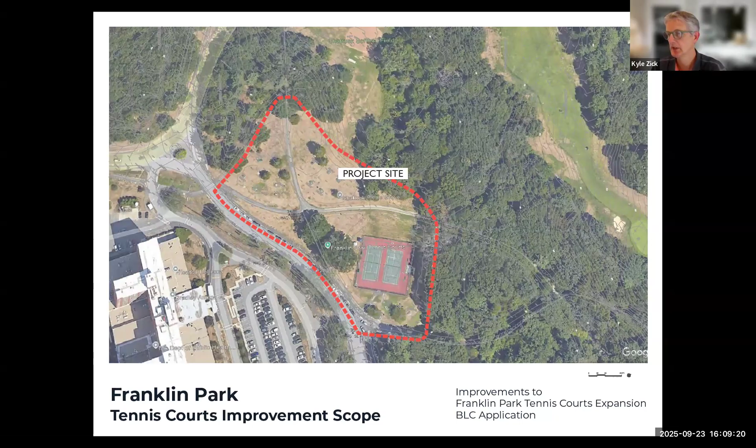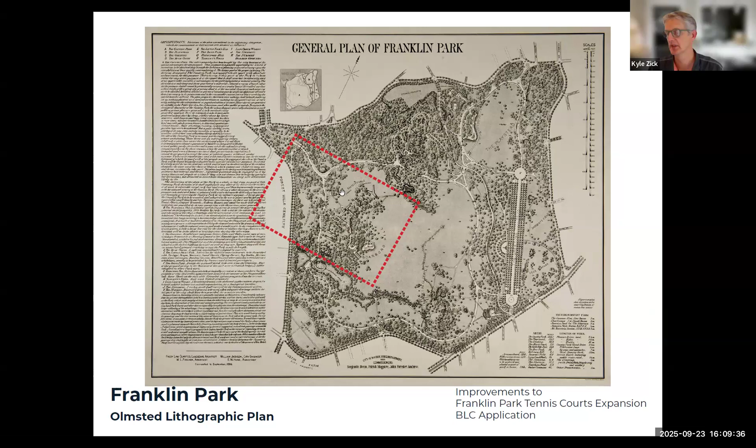Of course, the entire park was designed by Frederick Olmsted in the late 1800s. This lithograph represents the original design intent. I'll zoom into the area in this red dashed line. Generally, it's in this area of Ellicottdale. So Ellicottdale has had tennis grounds proposed from day one. It was lawn tennis, but there were dozens of tennis courts in this area. Our project site is right here, and this is the Shattuck Hospital.

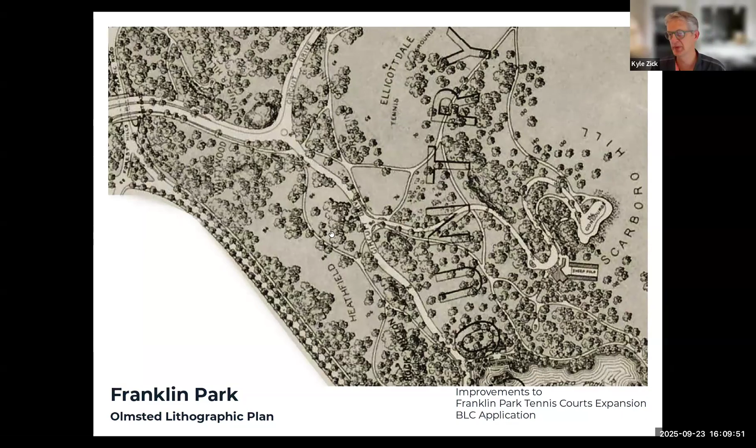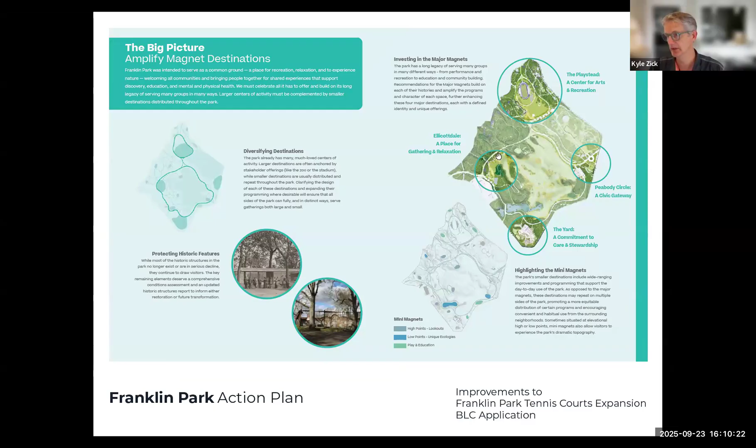As Lauren mentioned, this project was envisioned as part of the large amplification of magnet locations in the park, Ellicottdale being one of them. The tennis expansion was part of that idea that came out of the public involvement process.

They were showing 4 tennis courts. The reason we're doing 5 is because it allows Boston Public Schools to hold matches here, and there's a loss of tennis courts as part of the White Stadium project.

But the action plan recommended retaining the upper lawn and then having a lower lawn, which is outside of our project area - that's where the softball field is - and expanding the tennis courts. And number 4, adding a pavilion or shade structure to mitigate heat.

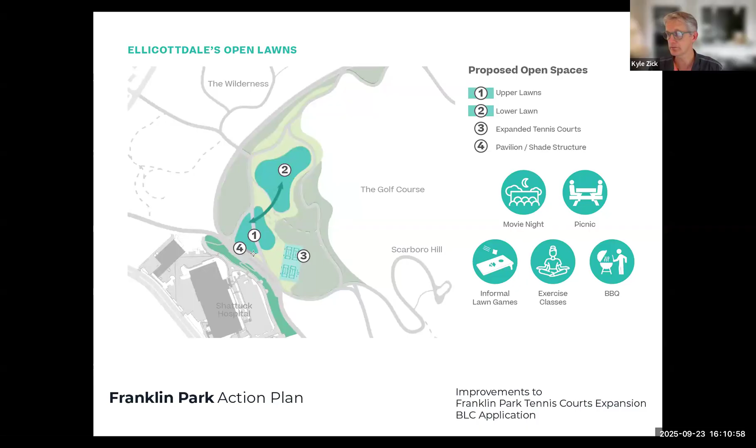Pathways would generally remain the same, although there were some alternative paths that are beyond our project scope. Within our project area, we're retaining or repaving as they are.

What exists today are a number of picnic tables, hot coal bins for people to dispose of their charcoal, trash receptacles, 2 paved tennis courts, and then trees and lawn.

Along the parking area, there's a running granite block wall that keeps cars from driving into the park.

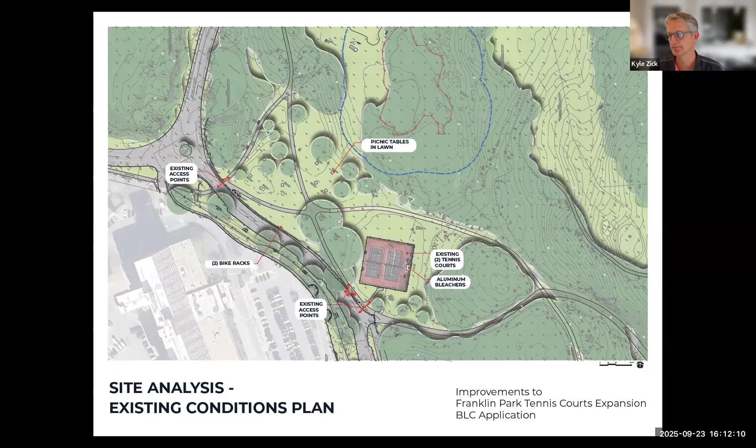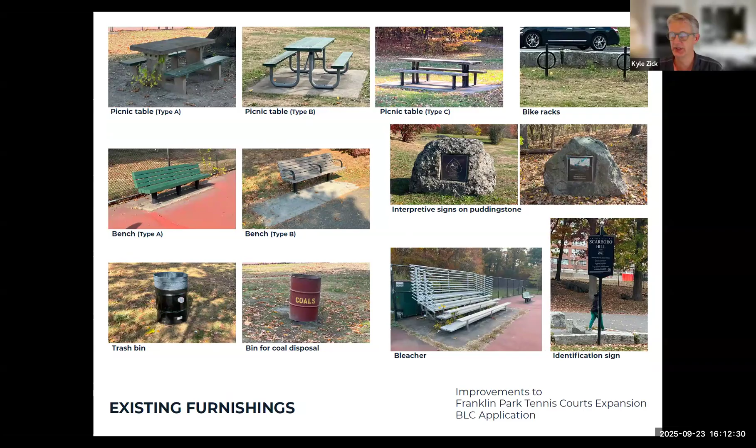The furniture that's out there now is tired - it's been out there more than a generation. You see concrete bases with wood that's worn, some metal and wood, some signage from the 1980s, the hot coal bins, bleachers, and signage that's representative of the Emerald Necklace.

The tennis court itself, I think, was from the 1960s, late 60s - asphalt tennis court with a red on green color scheme, chain link fence around it, plain aluminum bleachers, storage area.

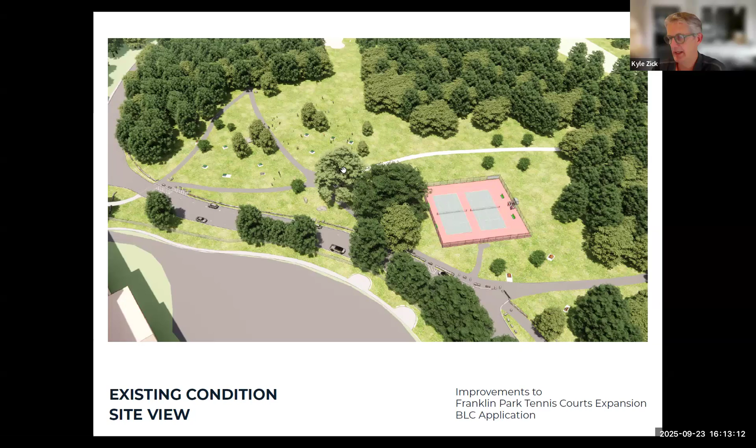We're adding a path parallel to the parking so that people can get out of their car, go through an entrance, and then traverse along parallel to the parking. It's also a desire line for people coming this direction to go towards Scarboro Pond and not be in the road. The 2 existing tennis courts are here.

So we have 2 courts to replace them, shifted a little south, and then 3 additional courts here in the same roughly north-south configuration, because that's ideal for tennis play.

And then the picnic area will be replacing the picnic tables almost in kind in terms of location, but we do shift them. We're also making them accessible and adding shade to 2 different picnic areas. And then we have shaded seating for spectators or for park use on 2 sides of the tennis area.

And then there's a little bit more substance in terms of the entrance to the tennis court, because it is such a social place. So we have some picnic tables there, a bulletin board for information. We have a blue bike dock, and we have a screen for temporary restrooms.

And Kyle, really—yep, quickly, sorry to jump in.

If we could jump back to that last page, I just want to clarify that when we talk about having 2 shaded picnic tables and 2 shaded seating areas at the tennis courts, that's 1 of each - 1 shaded seating at the tennis and 1 shaded picnic table - will be in the base bid for the project. Depending on the money, we will have as ad alternates the ability to have a second shaded picnic table and a second shaded seating at the tennis. I just wanted to clarify that.

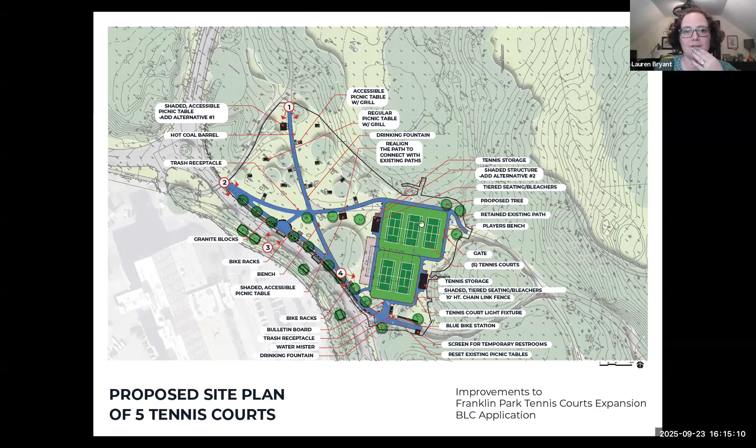And we'd be able to report on those findings before we do any construction. But because there is such interest in the tennis particularly, we would phase the construction of the tennis first and have the archaeologists do the excavation in the tennis area first, to keep our timeline moving.

Kyle, can I also just say that in addition to the Ellicott House site that is of interest, also where the tennis courts are, because of the stream downhill from the tennis courts, there's also interest in the tennis area for native archaeological finds.

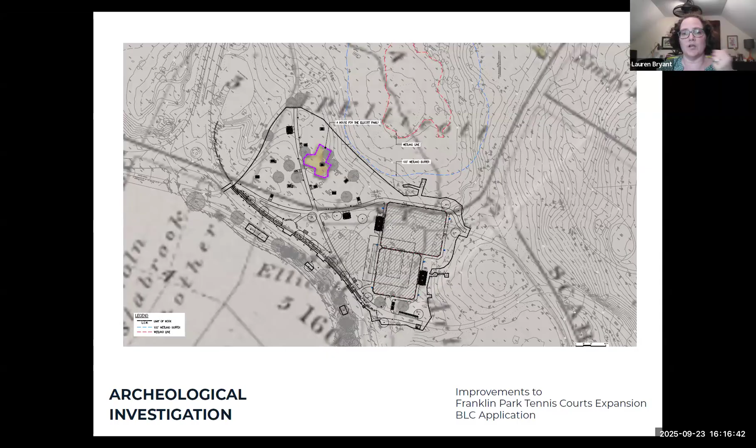And these are lighted tennis courts. That is because we get so much more use throughout the year by having light here, and there are no neighbors that the light would really impact. Plus, modern tennis lighting, you can really control light pollution very well.

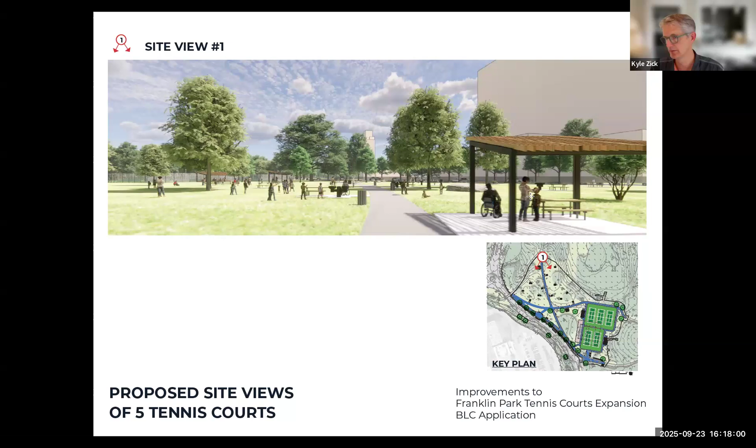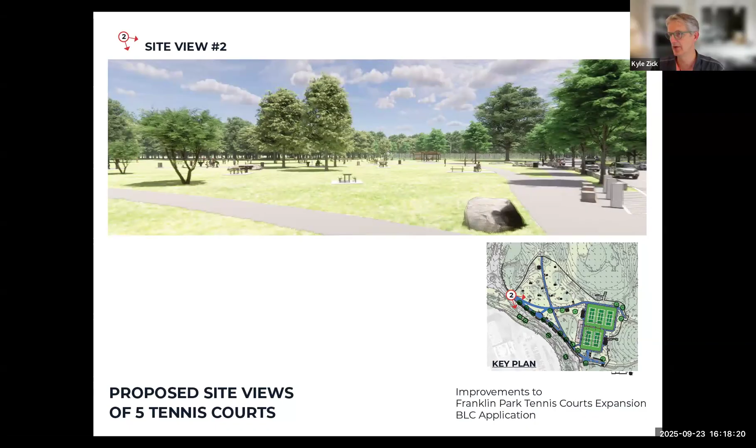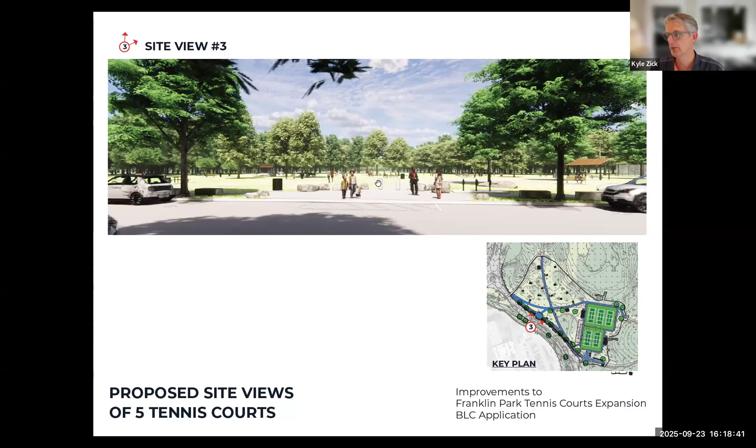This is a new entrance off of the parking and driveway to allow people to spill from the roadway into the park and along that new pathway. There is a ledge outcropping of Roxbury puddingstone here already, so we're kind of following that with this semicircular form, but then have some granite bollards to restrict access.

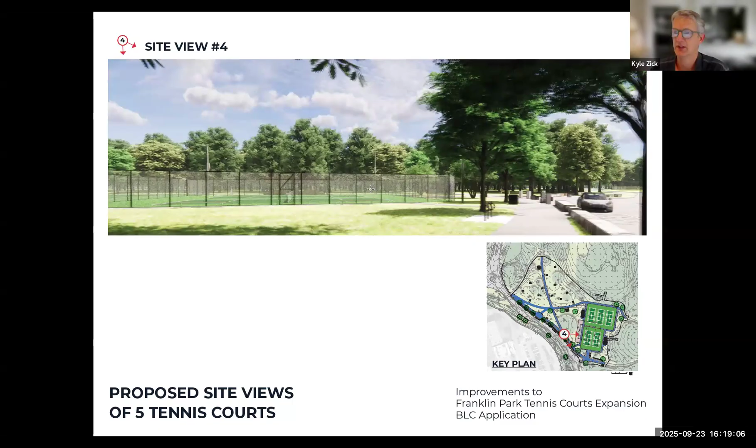And then as you get closer to this tennis court, it is a 10-foot high chain link fence, and that's something we coordinated with the Franklin Park Tennis Association, because they have a lot of beginners here and a strong teaching program. They felt that the tall fence around the perimeter was very important, because with beginners, balls tend to go in all directions, not always purposefully.

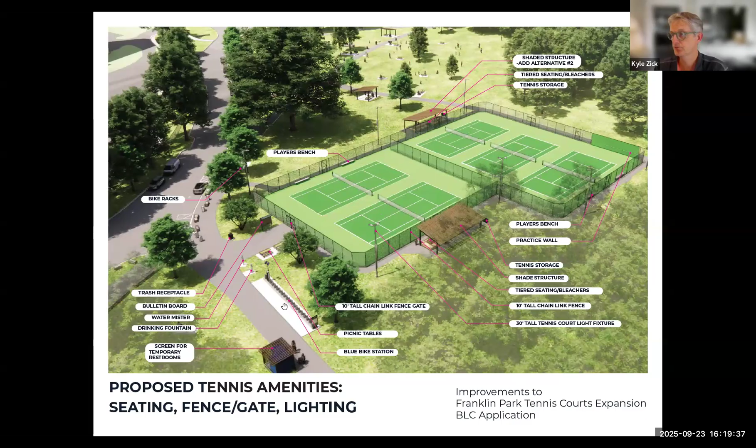The furnishings are similar in family to what exists, but all a little more consistent and all new. Picnic tables have a black steel base and a wooden top. The benches have similar materials, and we have accessible versions and companion spaces. The base bid for spectator seating is a powder-coated black bleacher. We also have drinking fountains, grills, bike racks, and the blue bike dock, plus trash receptacles and disposal for hot coals.

And I mentioned the tennis court light fixtures. Here's an example of those.

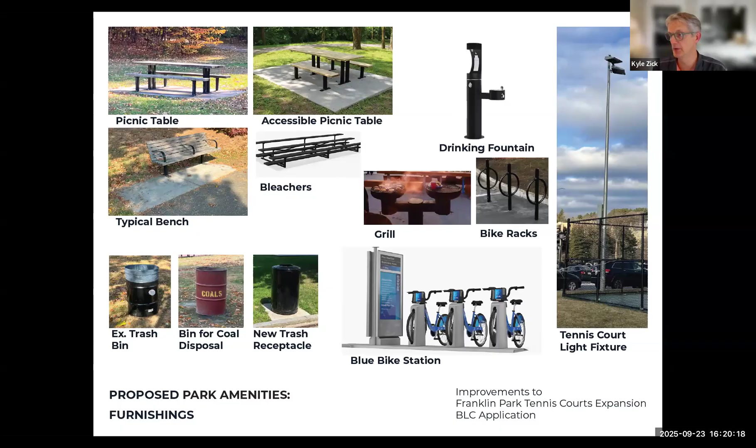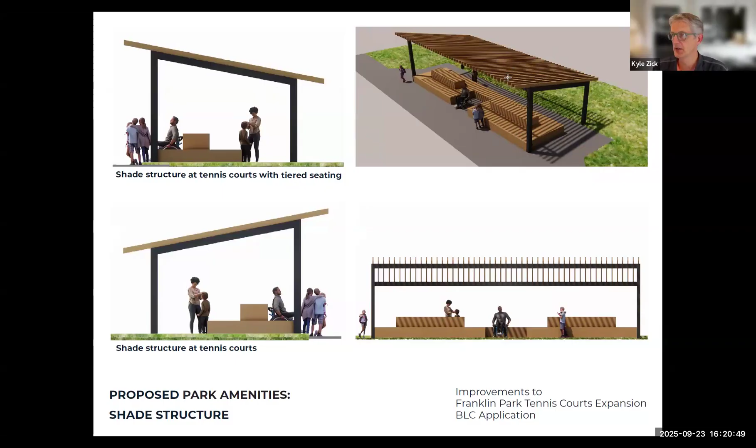I wanted to show a few views, particularly focused on the shade structures. This is one of the larger ones adjacent to the tennis area. There's two—one would be base bid, one is an add alternate—and we have tiered seating underneath. The base bid would be that black powder coated aluminum bleacher, but it has an angled top. We're trying to maximize the amount of shade we get on the seats themselves. This would be a black metal frame with a contrasting color purlin on top.

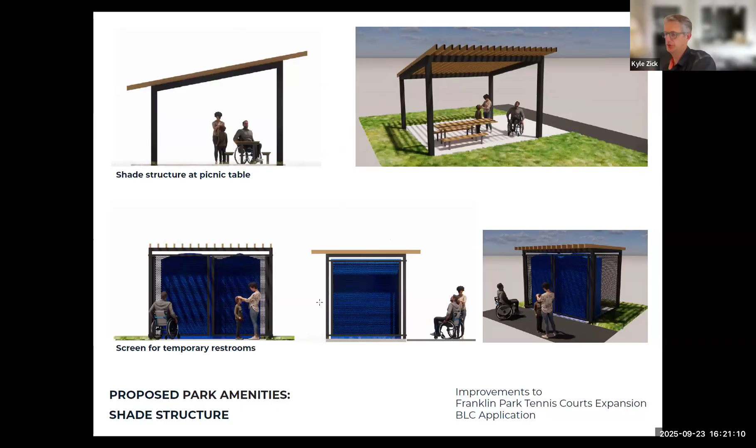The picnic shade structures are similar in design, same kind of framework, same slope, just smaller in scale. Similarly, the screen for the temporary restroom has the same structure, but we do have a perforated metal panel to help minimize the view of the restrooms. And then I'll wrap up going back to the view of the proposed project so we can talk about your comments or questions.

Okay, thank you. I just have a quick question, you might have already mentioned it, but I didn't catch it. The surface of the tennis courts—is that going to be a granule or a rubberized surface, or is it asphalt again?

No, it's paved, but it's post-tension concrete, and it will have this green-on-green color surface. The reason we're doing post-tension concrete is it lasts much longer than asphalt. With asphalt, you'd expect to see cracking within 5 to 10 years, but with post-tension concrete, it's a 50-year court. You just have to redo the top surface on a regular basis.

I don't have any more questions about it. I think it looks fine the way it's been presented. So do the other commissioners—Walker, Orlando, or Haney—have any comments? Thanks, David, I'll jump in.

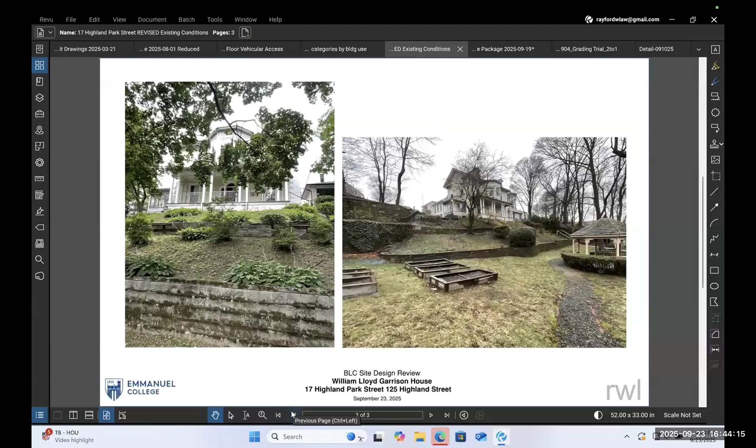Okay, great, thank you for coming back, and thank you for coming back so quickly. Well, motivation, I think, would be the operative term there. So let's pull up... oh, like leave the meeting? Let me use the back. You want to leave? Okay, we have audio and video for everyone?

Yeah, we do. Great. Just briefly, this is a continuance from our last meeting, and we heard your remarks very clearly, and wanted to get back as soon as possible to respond, because the construction, as you see from some of the photographs, is underway, and we'd love to at least start the process for the site work in conjunction with the wrapping up of the construction in a few months.

I think just to briefly review the existing conditions that we're primarily responding to before we met with you: the grade that we see in the photographs from the 19th century has definitely dropped off, so that we see almost a 4-foot delta between the porch floor and the surrounding grade. After 170 years or so of erosion and wear, we would like to actually restore that. You can see it quite dramatically here in the picture of the front porch, and then looking up as well.

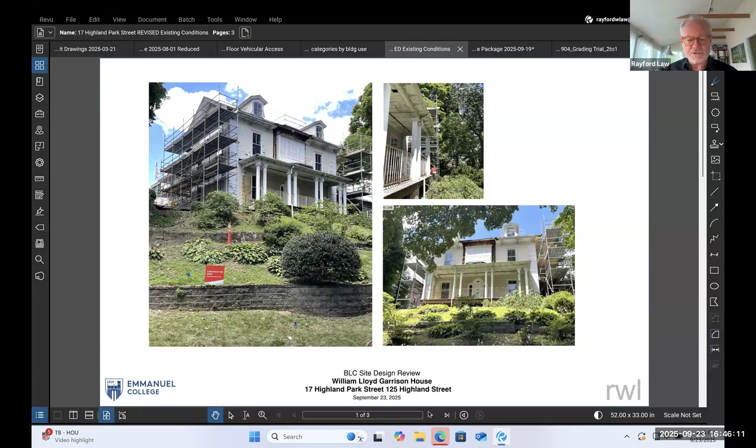Also to note that there have been retaining walls in place. We're not quite sure when they occurred, but we don't consider them to be historical, and in the interim case here in the middle of the site, they're certainly not functional. This stone wall is falling apart, it's visible right now. The timber, wood, the railroad ties that are here are actually rotting and do not do any work. The wall at the bottom, which is a cast product, not natural stone, is doing the work, and we anticipate, in response to your remarks, that we would maintain a wall at this base.

Then a general sense of the landscape as it exists today.

We do want to note, in the context of previous discussions, that with the photographs we have at hand, the porch floor really was never visible from the sidewalk. We say that because we can look at the 1891 photo here. You see the street lamp, which means we're clearly across the street and elevated probably 10 to 15 feet in the air. Similarly, in the high resolution photograph we've relied on for the historical detail of the exterior restoration, we can barely make out the porch, but that light fixture is in the lower right-hand corner of the image.

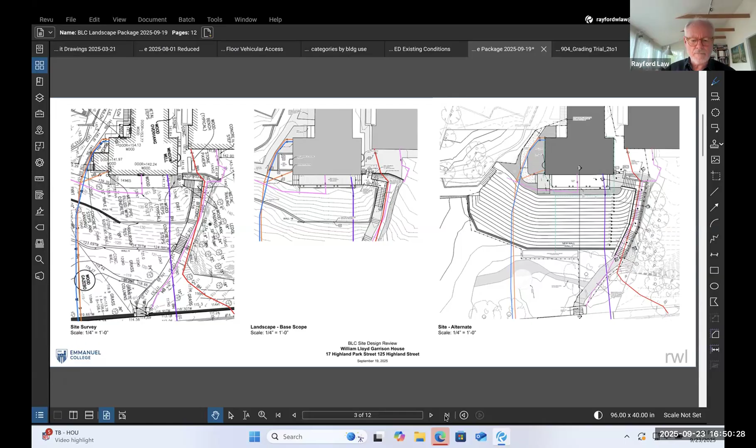I'll show you the detail of that. A little more detail, just to show the 2-to-1 slope we have here, 2 horizontal, 1 vertical. There will be an upgrade to the utilities. We have this unfortunate marriage of water and sewer that has been inherited, which we will separate somewhat on the hillside here; we will leave it as is once it goes out to the street. The gas, we can't speak for the gas company, they tend to operate on their own terms, but you can see the stormwater coming down from the house above. Fiber optic and electric will be running down underneath the stairs. The existing stairs are here, so there's really minimal impact, and we're balancing the cut and fill so there's very little additional site work to do on that part of the site.

Showing you the site section, the clear, simple landform that Kyle has helped us with, showing that 2-to-1 slope, the 3 to 4 feet from the edge of the porch to the break in the grade, and then about a 4.5 to 5 foot wall at the base. You see the stormwater basin here. And then, just for reference, we were showing the views from a pedestrian on the sidewalk, how close we get to seeing the porch, and then what we presume to be the camera viewpoint from 1891, 1892, or in that case, 1876.

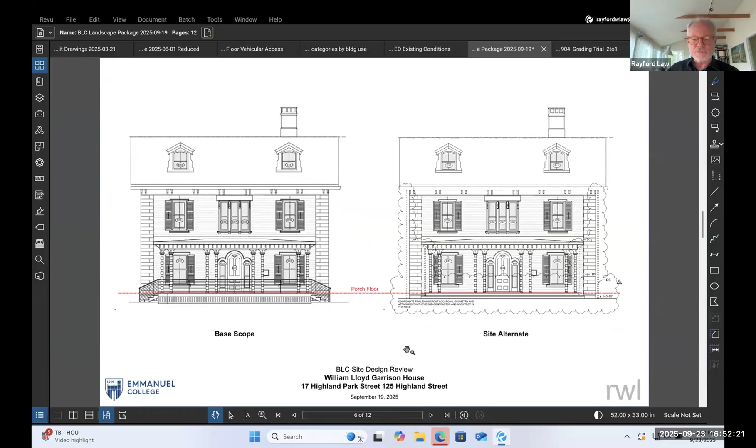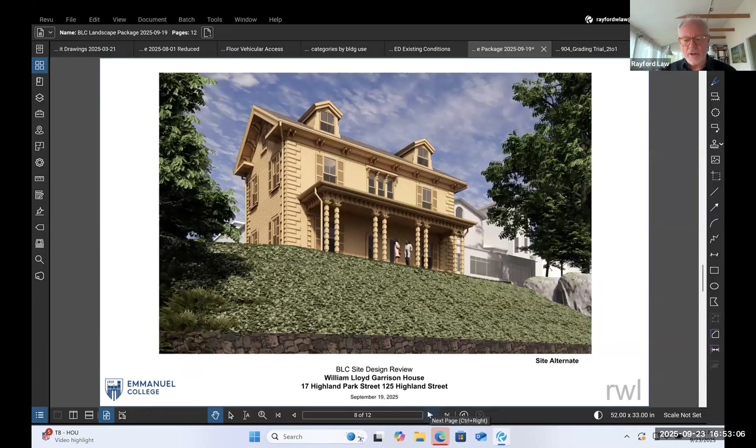Kyle has proposed a couple of different varieties of ground cover. Here we're just showing the English ivy. We think that's the simplest and the richest and hardiest that we can use here, and to keep all of the planting quite simple and keep the landform simple as well.

Just to confirm the views, the historic views from the sidewalk, we set up this that shows the wall in the foreground that's being rebuilt, the stair wall that's a function of rebuilding the stairs. Because with the increased height of the grade, we re-parsed out the runs of the treads to evenly head up the hill.

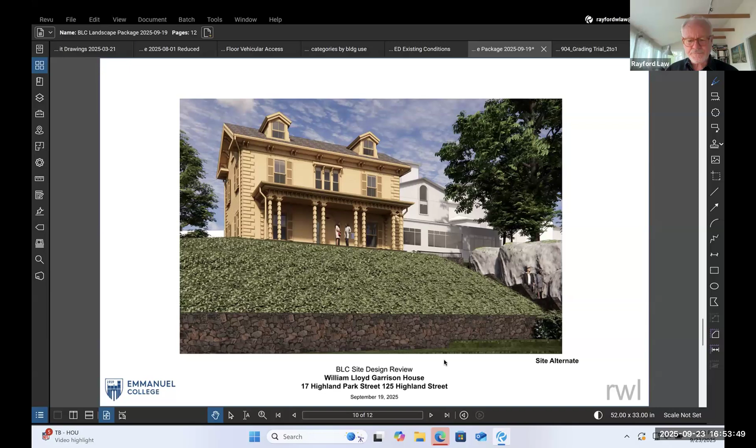The model that we were using to make sure that the geometry for both the landform and the stair is working out, as well as the detail for how the stormwater chamber and the excavation for that would be tied into the construction of the one retaining wall at the base of the hill.

We're looking for locally sourced, we're going to say granite, whether it comes from Vermont, New Hampshire, or Massachusetts. At the moment, the available one seems to be the Ticonderoga. Puddingstone is not available. We need probably 20 cubic yards of stone, and unless someone is offering their foundation wall, their house, we just don't see that being commercially available. So we were looking for a random ashlar that will have a dark mortar that would blend in. The intent would be to have the wall tend to disappear into the landscape.

And that, I think, would summarize the intent with our coming back to you. Kyle, do you want to add anything? No, I think you covered it. Thank you. Thanks, Rayford. Thank you.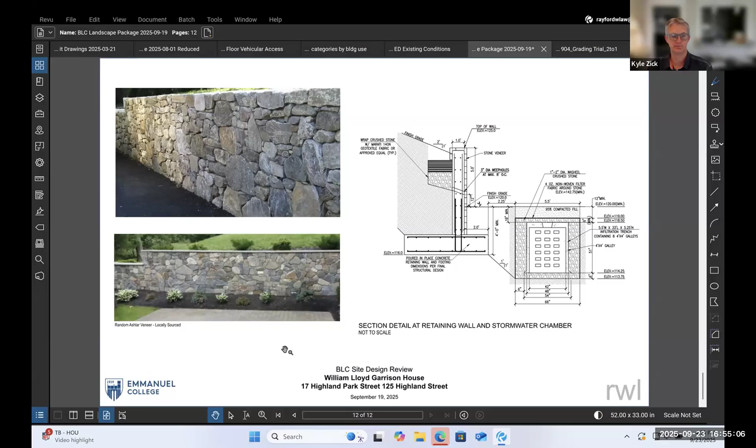So with the 2-to-1 slope, you don't need to do any subsurface reinforcement at all to the soil? No, 2-to-1 is very reliable in terms of being able to, with an aggressive ground cover like we're proposing, we can maintain that very easily.

Well, I think it's a huge improvement. This looks terrific, I think, eliminating those walls. But I thought you said the wall at the very base, I thought you said that was an existing segmental retaining wall that's there. There is. It is an existing one there, but because of how we're regrading, we feel the need to rebuild it.

Just the accumulation of the forces, and also it's not a wall that we would say we're fond of, and it is doing the work, and we have to do the excavation anyway for the stormwater. It just seemed to make a lot of sense for the benefit of the durability of the project over time to rebuild that wall in the same manner that we will be building the stairs.

Right. I'm glad to see the segmental retaining wall gone, and then this will be a stone veneer on it, I'm assuming from the detail I think I saw. So it'll be much nicer looking.

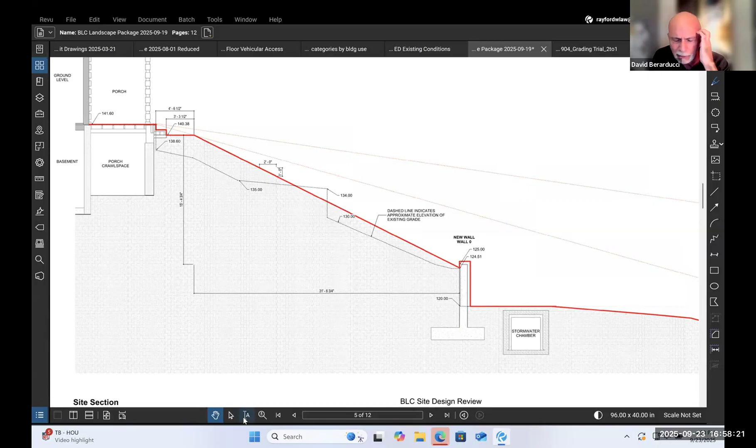Okay, it looks great. And did I see, I thought I saw somewhere when I was scanning the presentation, are you planning to put some 3 trees in the front?

Well, I appreciate the question, Dave. When we look at the historic photos, we did notice the pause in the landscape. And Kyle will attest because he's been quite good as a vigilant caretaker of the landform, that we just want to keep it simple. As much as there is, I'll just say, a scale device that was, I'll assume, deliberately employed, it just gets really tricky in terms of how one might introduce the planting for that type of feature. And at the end of the day, in a non-residential, institutional use that we feel will have, I'll just say, less attention paid to the maintenance of the landscape than a resident might, we felt like just to keep it simple and keep the ground cover going and continuous.

But we looked at that and we tried, and that's in fact what was submitted and what you were looking at. But I think Kyle quite correctly said, you know, it's going to be a tough one, picking the right things, because you can see there's a casualness here that we couldn't actually entertain with the formality of that landform. Yeah, and no, I mean, I think it's going to be better without it.

And it would be tough to create a little bit of a shelf for the water to settle on the tree roots rather than just wash off. So I think it's going to, and then it won't block the house at all, I think, as the trees got larger. So I think it's nice to keep it clean and open.

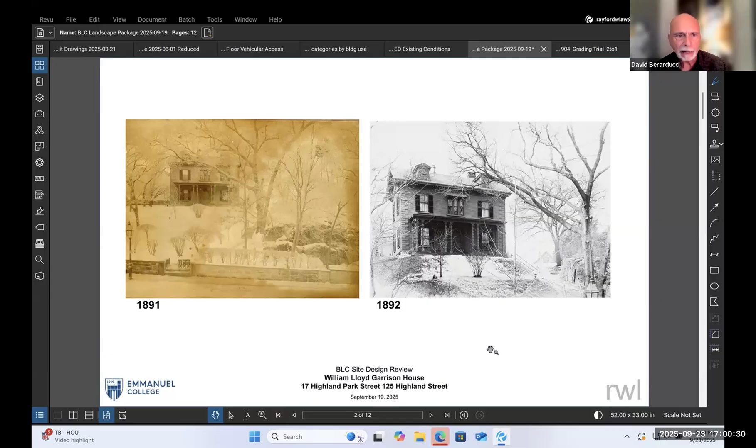And Brad, Justine, or Jeff, if you've got anything else to add. I'll jump in to say I have nothing to add. I appreciate the added work. I appreciate just the recent conversation about the 3 trees. I'm glad they're not part of it.

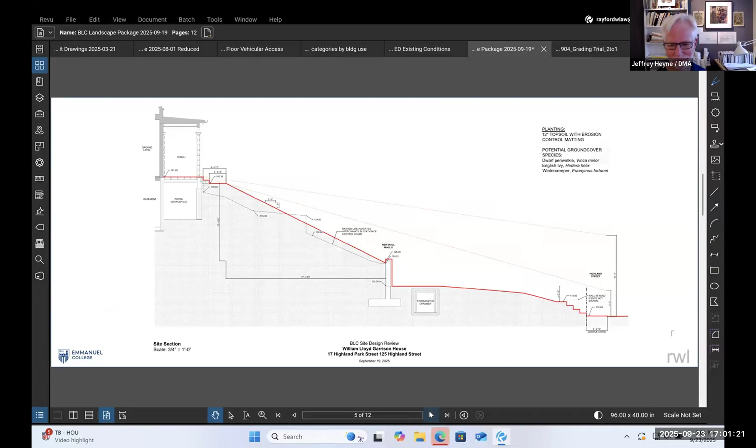Okay, Justine or Jeff? I'm good here. I'm actually lamenting the loss of some maybe small specimen trees on the slope, and maybe even the delight of the urns that were there. That's just, I'm trying to create a little bit more of a frontal or a middle ground between the street and the actual porch. Those old features, like my eyes sort of went to those things as sort of a scale device looking up the hill. Okay, so noted.

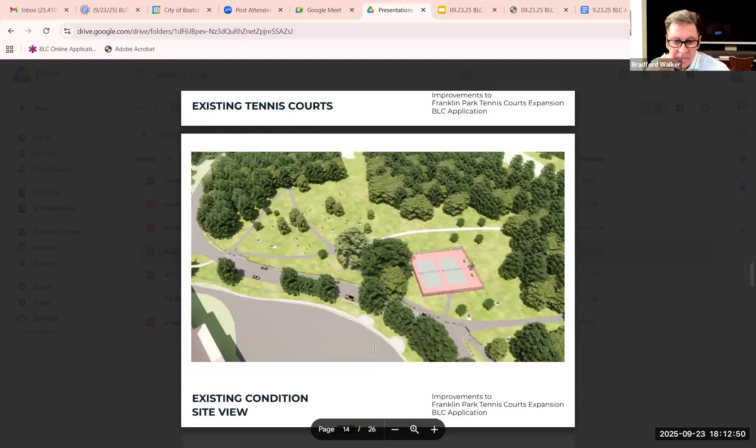This one here was the 5 courts that were proposed. The shade structures were going to be pergola structures over the sitting areas on the two ends of the 3-court run and the 2-court run. There were other interim areas they were considering, but those would be part of the add alternates.

There were also improvements to the existing furnishings. The picnic tables were quite old, so they're upgrading those, along with the barbecue pits or elevated platforms and trash receptacles. The most important thing for you as commissioners is that this is consistent with the Franklin Park Action Plan, which has been heavily vetted by the public and the city. So we didn't experience any surprises here, except that archaeology will weigh in—they've asked for a certain number of test pits in this area, and the applicant has agreed to do those and report out on them.

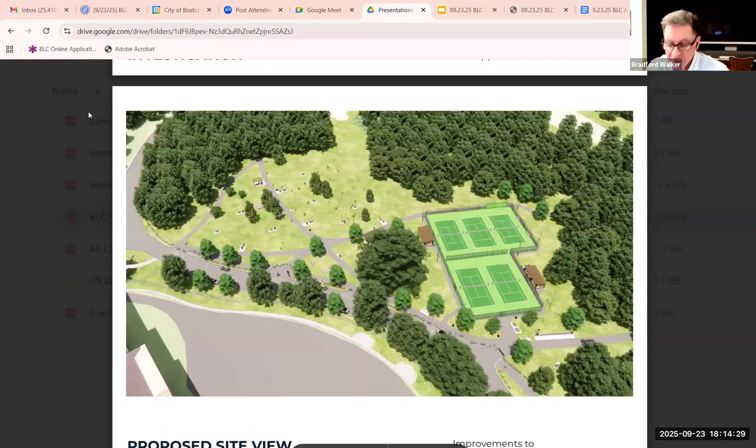All right, if there are no further questions, I think we do have the proviso about the archaeology. I have a motion and a second. So I will move to the vote and ask Commissioner Jacques, please.

Yes. Commissioner Freeman, yes. Commissioner Orlando, yes. Commissioner Berarducci, yes. Commissioner Mac Jones, yes. Commissioner Hoffman, yes. Commissioner Gagno, yes. Commissioner Hart, yes. And I vote yes.

So that matter is covered. We move on to the next one, David. Yep, and that was application 26.0236.

It's the William Lloyd Garrison House at 17 Highland Park Street in Roxbury. They were returning to us from their previous hearing on August 26th, where we had asked for a continuance based on our wanting them to relook at the regrading of the front of the house.

Originally they were going to be proposing a series of retaining walls to make their way down the slope, and we thought that was just interrupting the pristine view of the house. So they relooked at it, and they were proposing now a consistent 2-to-1 slope all the way down to where there is one existing retaining wall, but they will be replacing that existing retaining wall with a new one. That will make the slope a much cleaner slope.